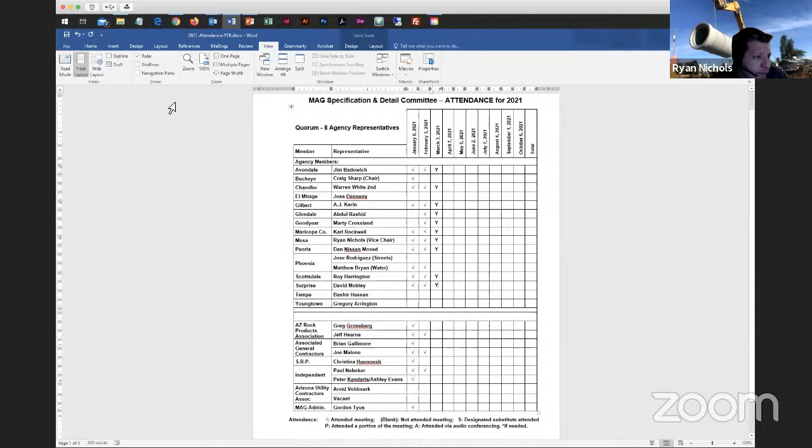Okay, Scottsdale, yes. Surprise, yes. Tempe or Youngtown? Okay, going back to Phoenix one more time. Matthew's a yes via text through the chat. All right, thank you. So the minutes are approved as sent out.

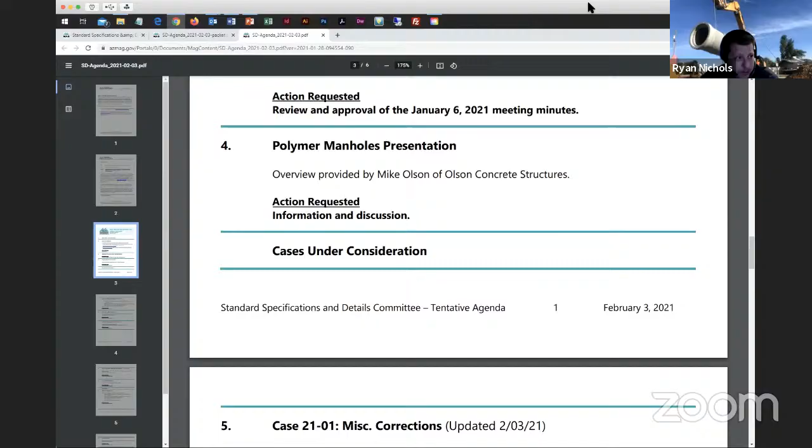Okay, moving on to item number 4, polymer manholes presentation. We'll have an overview provided by Mike Olson of Olson Concrete Structures, and we'll turn the time over to him. All right. Well, first of all, can everyone hear me? I'd like to say thank you guys for your time. I know that I only get 15 minutes, so we sent out a couple PowerPoints. Hopefully there's been some review.

Just a quick background on myself. My name is Mike Olson. I am pretty much a native Phoenician. I've been commuting back and forth between Phoenix and Vegas for the last 30 years. Cut my teeth working for my dad since I was 13 at a company you guys probably are aware of, Olson Precast of Arizona. And super excited to not be competing against them, but into this new technology called polymer. So that's where we're at today. We have opened up our plant located on 35th Avenue and Lower Buckeye. Super excited, state of the art.

So what I wanted to focus on was our product, and with only 15 minutes, I'm sure there's a lot of questions, but this just didn't happen overnight. I've been researching and looking at polymer products. I've teamed up with a couple different polymer outfits from around the country, and each one I felt at the end of the day, this isn't going to work, or they didn't have their technology down.

About 5 or 6 years ago, my division manager in Tucson had met Rich Cabetta with the Solid Cast polymer group, and they started doing projects and selling some stuff. Slowly I met him, and I was a little bit tentative. As I got to know Rich, and researched the mix and the design and the qualities, I got pretty excited about it. And so we took the big plunge.

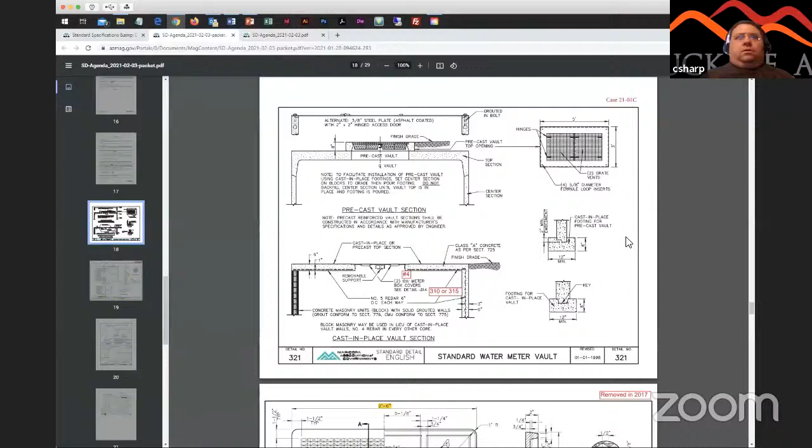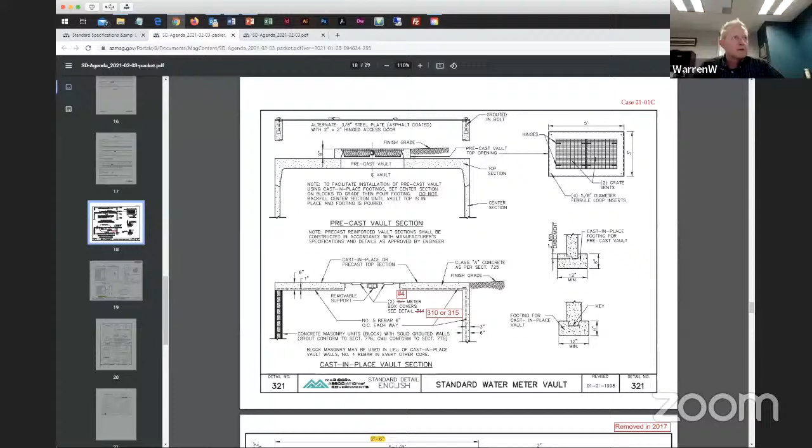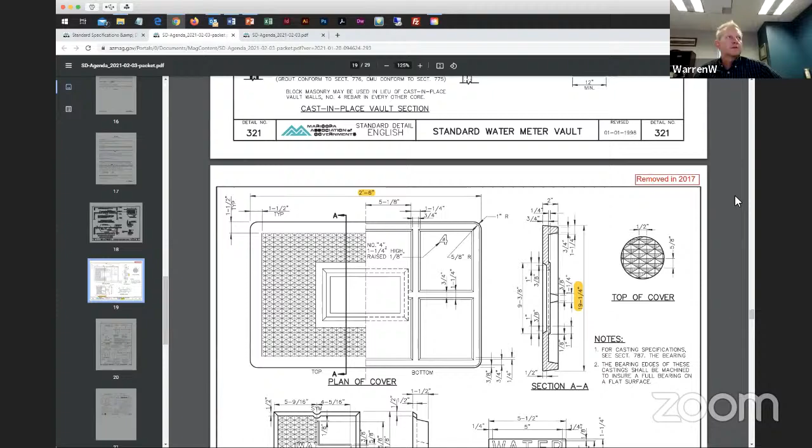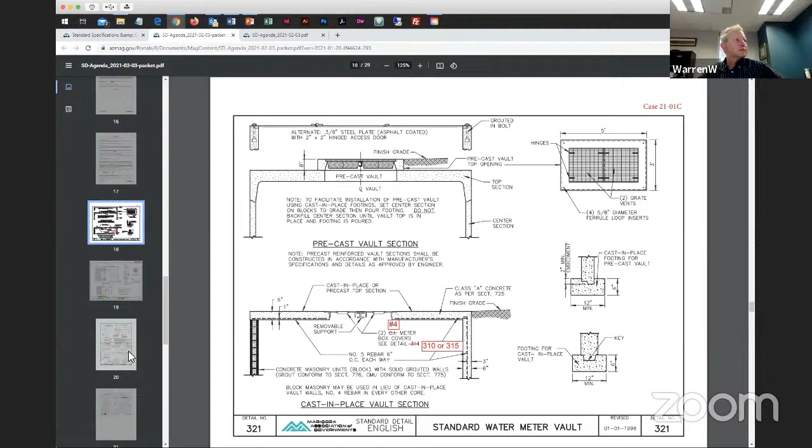From what I can tell, at least in Chandler and some other agencies, most seem to use more of a hatch cover type of setup versus the box covers like this, but that's open for discussion. And that's the next one down in the list there Gordon was going to click on. So for the larger meter vaults, agencies have similar details, it looks like, where they actually specify the vault dimensions. Maybe it's cast in place or a precast type of vault setup. And then they have a special type of lid that may be a non-slamming type of lid, things like that. So that could be another case down the road for us to discuss in water and sewer maybe.

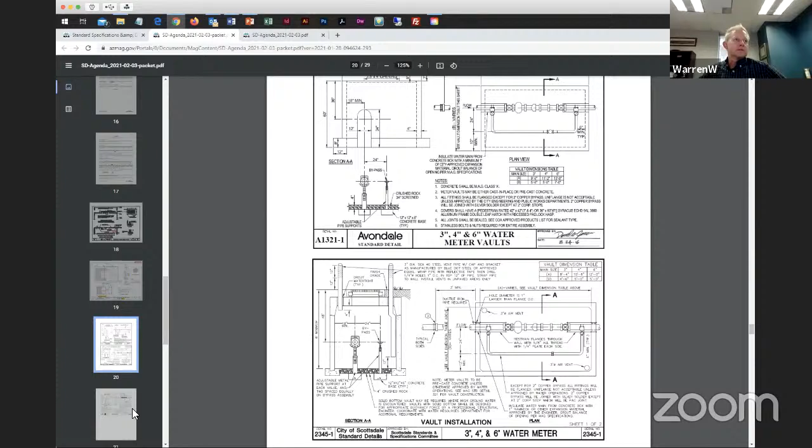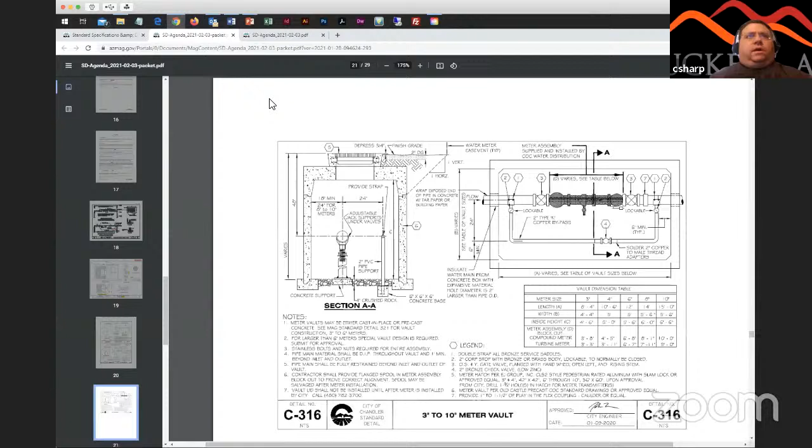You can see here on the Chandler detail, note number 5 says meter hatch per EJ group style pedestrian rated. So we may have two types of generic hatch details, potentially for a pedestrian rated or traffic rated with the slam lock, something like that. But again, we may want to talk more in water and sewer if that's more or less the standard out there. And I haven't looked at all agencies. Okay. I'm assuming most of these hatches or lids have like a spring assist on them. Is that one of the standards? Yes. Okay.

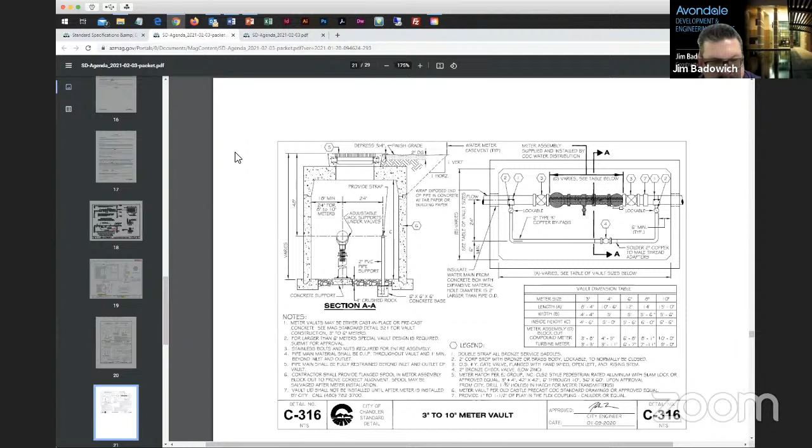Are we just talking about the lids, guys, or the whole vault itself? The lids, but the vault, again, if we wanted to discuss standard vault dimensions, that could be a topic in water and sewer if we thought that would be helpful. Yeah, we've looked at these and we've had to modify a lot of our jobs. We end up with custom designs because of the way the plumbing is, like for PRVs. If you have a large PRV vault, there's more plumbing involved, and some of these, like the MAG ones, don't work, so you've got to come up with your own. So it's a tough one to come up with a general standard. Maybe we could have some items that are standard and then the sizes can be variable. That's what this vault dimension table on the Chandler one does, I think Scottsdale may have that too, where based on the size of the meter, it determines the size of the vault.

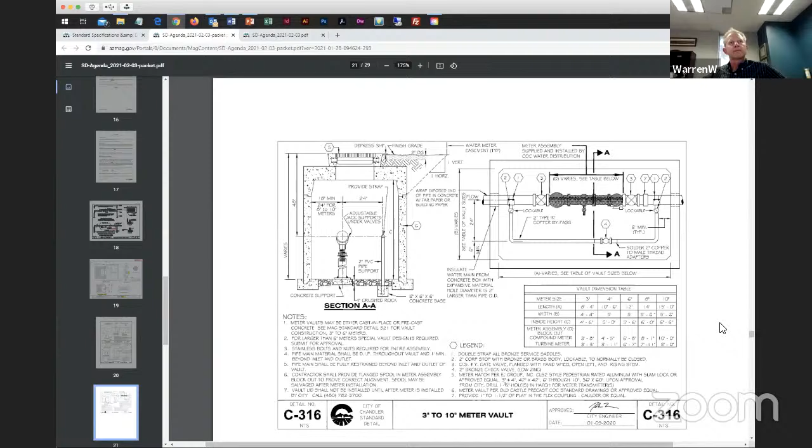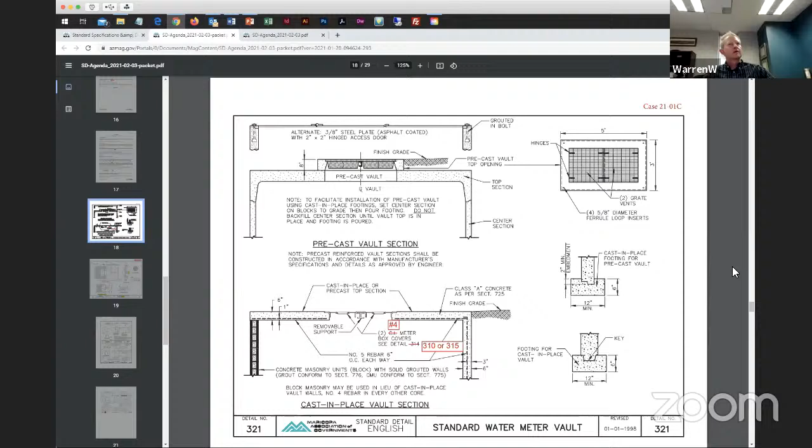Yeah, that's a great idea. It's probably been 10 years ago when we did this, but they were building these massive vaults out there that people could live in. So then we scaled them down to be more appropriate for the meter size, and not too small, of course, because you've got to get down there and work in it. But anyway, that's something we can talk more about. Okay. Thank you, Warren. I know in Buckeye we're trying to get away from the underground vaults, confined space issues and whatnot. But in terms of the lids, we can definitely discuss that more in the water and sewer working group. For the miscellaneous corrections case, you're just looking at replacing the lids on this first sheet, correct? Yes. Okay.

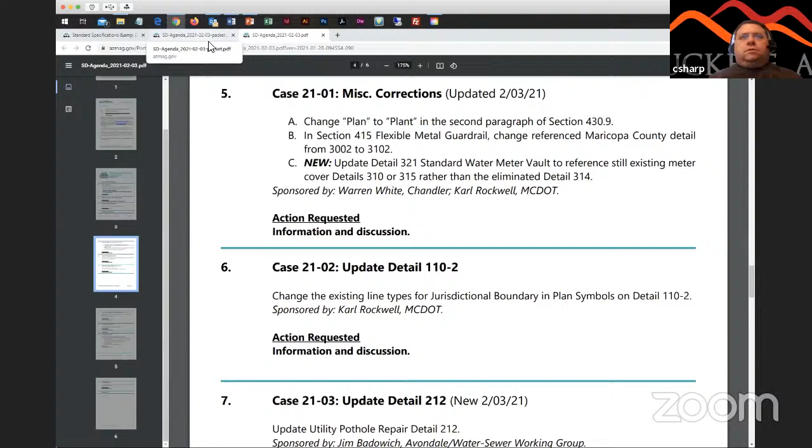So, okay, moving on. Number 6, case 21-02, update detail 110-2, plan symbology. Karl? Yeah, this is a request from our CAD group. The current jurisdictional boundary is pretty thick and pretty solid, and it obscures important information. We'd like to make it more transparent and not as thick. That's really the whole change. I don't know if there's any questions on that or not.

Did you have an example, or are you guys still working on that? You're looking at the example now. I'm sorry, I don't have an existing one to compare it to. Okay, I just see it's grayed back a little bit. Option 1, option 2 is a little more bold. Yeah, I don't think option 2 changed. Okay. Yeah, I think it's pretty straightforward. So, anybody else have questions?

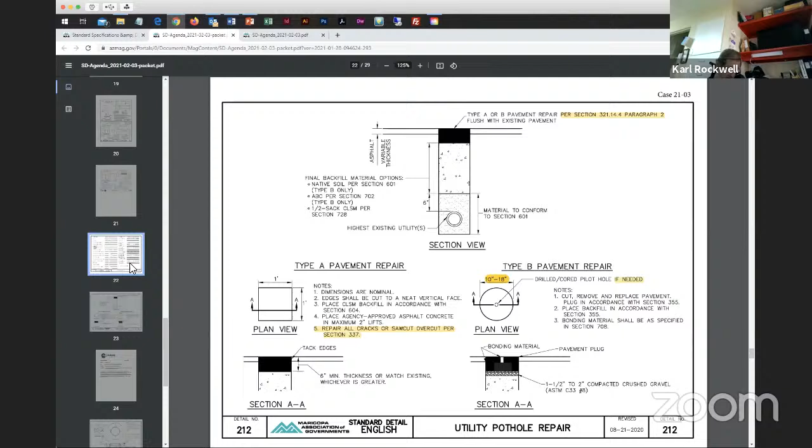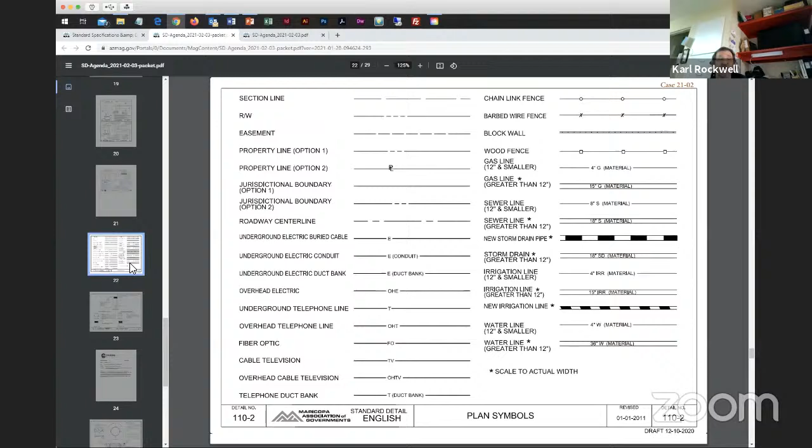Okay. We can move on, Gordon, to the... Yeah, actually, for both the existing ones now, option one is a really thick, solid dark line, and option two is just about as thick and grayed back a little bit. We'd like to go to a lot thinner, and for option one, a more transparent type of line type.

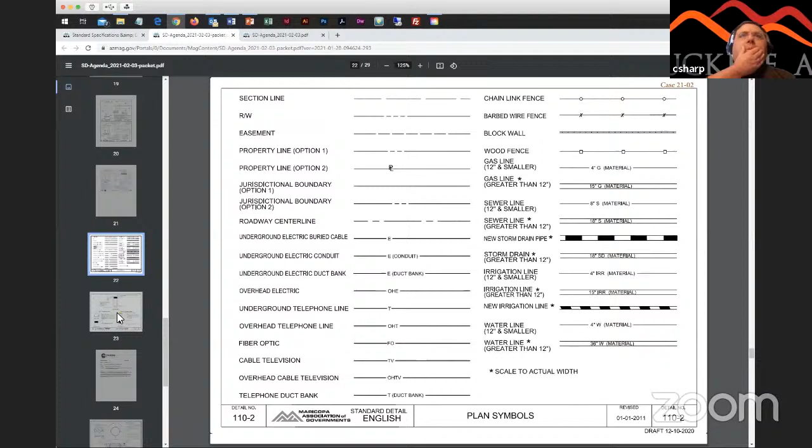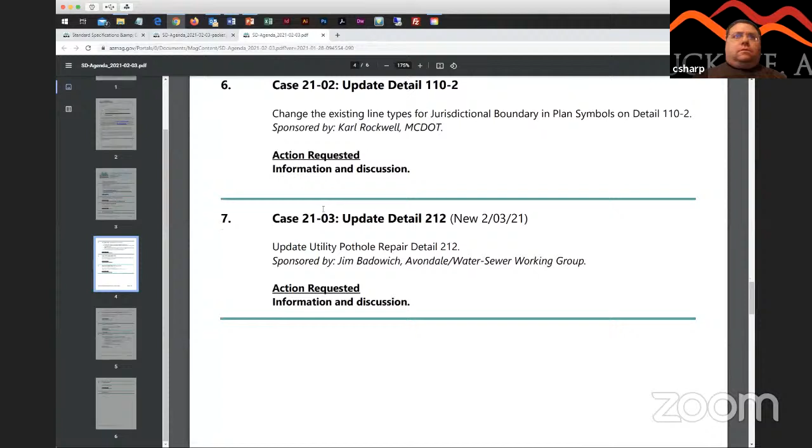Okay. Any questions? Okay, thank you, Karl. Gordon, if we could go back to the agenda real quick. So moving on to item number 7, case 21-03, update to detail 212. This is the pothole repair detail we've been working on for a while. Jim, do you have an update on that?

Yeah. I think you see in front of you the detail, the highlights. Those are the things you wanted to add or change. I think one of the big things in the last meeting we had from Arvid was that section AA on the right side there. Originally, it actually showed the hole going all the way through, and Arvid pointed out that that's not necessarily the case, and so we cut off part of that hole, and it just is a small area now.

And then he was saying that I guess drill rigs don't need a pilot hole apparently, so the pilot hole may not be needed. Right. So that's why that's an option there. Yeah, he says depending on the Vactor truck, it just might be able to pull it right out of the hole without the pilot hole. Right. Then on type A there, item 5, you want to repair the cracks or saw cut overcut. Right. So we talked about it a lot. I know the materials group came up with some alternate materials. So I think we've got a pretty good setup here with these.

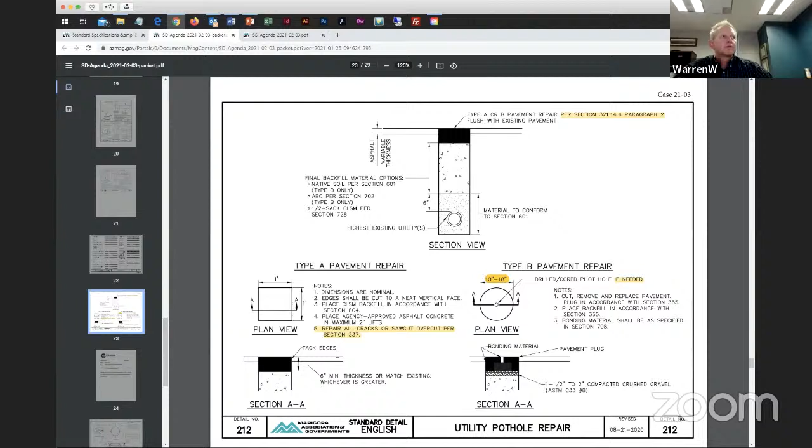Okay. Is that what you're implying, Warren? Yeah, exactly. We just wanted to get it before the main committee and see if anybody had any additional comments. And actually, even with that edge mill, with or without the plating, it prevents that edge from easily allowing water to penetrate the subgrade, right? Yes. I'd like to ask everybody, I haven't seen a whole lot of plating for these small plates, because I think there's a danger that they can fly out. Yeah, that's definitely uncommon, as it relates to a plate that size.

If it were something that small, right? If we were to protect it, it would be a cold mix and a temporary solution prior to coming back for the permanent repair. A plate that small is just something that we wouldn't use in the roadway, nor is the availability really there.

Yeah, it's not typical. You're right, Joe. I don't see it too often. If it's temporary, they usually just put the native back in there and just cold patch it, and then when they're done with it, for permanent repair, they suck all that native out and then put in AB or a CLSM and then patch it.

Correct. Yeah. And a lot of times, I see the hole size there. In an ideal world, that utility would be able to be found in there. Sometimes the size of that hole is growing if we're trying to chase a utility that's not technically where it's supposed to be. And if there's a cluster of them in a certain group, then we would get to a manageable size to get that location repaired accordingly.

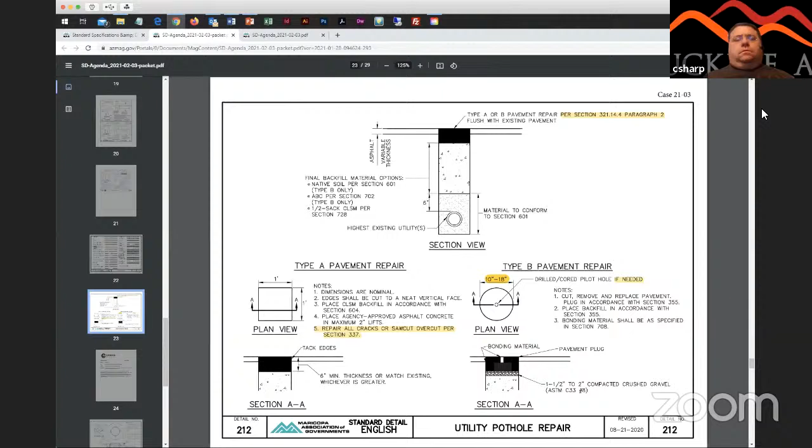Okay. Have you guys ever done an edge mill on the type A repairs? No, not typically that small. It likely wouldn't be a problem depending on how thick and what condition the asphalt's in. We just use a small milling machine attachment on a skid steer or something like that. It definitely would drive costs up because that's another step, another piece of equipment.

And it's something that needs to be done on sometimes a large amount of potholes depending on the size of the job, so that's one thing to consider. More often than not, the potholes accompany a full roadway replacement in an ideal situation, or are in line with a trench repair. So if it's kind of a one-off, it probably wouldn't hurt to explore that, but it increases costs accordingly.

With that operation of an edge mill, you figure you've got a 1x1 hole. Typically you would edge mill with a milling machine like that a minimum of a 1 foot edge mill in addition to that. It's definitely a very small area, based on the size of even a smaller piece of equipment that would be performing that work.

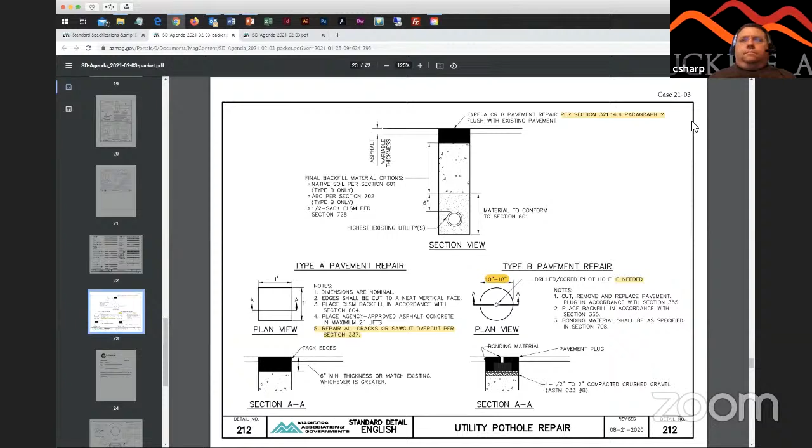So whether or not the ends would justify the means there is something that would need to be determined. That's true. One thing I'd like to add on this is that one of the reasons we're looking at this, Joe, and everybody, is that there's just too many of these failing, and so the idea was, well, we've got to beef up the type A, with the thought that hopefully we can get more companies to go to the type B.

Because I know cost is a factor, but the problem is they're failing. And so we've got to look at the spec and maybe see where we need to improve upon it. And that's why the type B is something I think agencies are pushing more for. We've talked about it in Avondale, to start to require it, even for temporary, because then you're in and out.

And the other thing too, a lot of potholes now, guys, are being done by the dry utility companies, the cable companies, fiber companies. And all they're doing is boring and they're not coming back. If you're doing a water line or whatever, you're going to come back and do a trench replacement or a complete replacement or a mill and overlay on the street.

But I think the majority of these potholes are being done by the horizontal drilling companies that are working with dry utilities, and they bore their utility in, and then they're gone. So that's the issue, their repairs are permanent. So that's what we've got to do. That's a great point. Bore shots and everything.

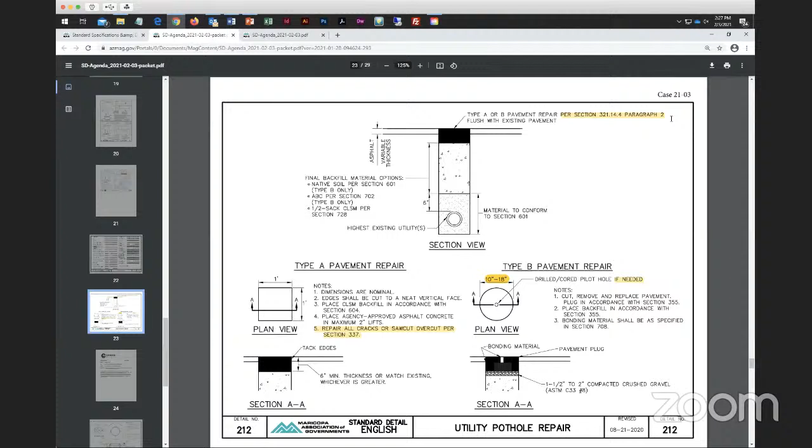But by far, that's our biggest problem with these repairs failing. It's the dry utility companies that aren't repairing them properly. And so I think that was the onus behind making this a little bit more stringent, so that they're going to have to adhere to it. The city CIP projects for pipelines and other stuff haven't really been an issue, because like you said, the stuff gets replaced completely anyways. So it's mainly the dry utility companies that are the culprits in this.

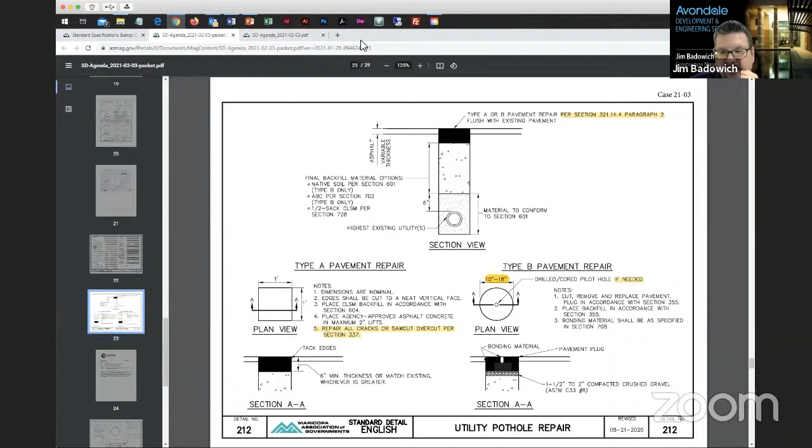So anyways, I don't have any more comments. If anybody doesn't have anything else, we can move on. Okay. Well, good discussion. Thanks, Jim. Thank you.

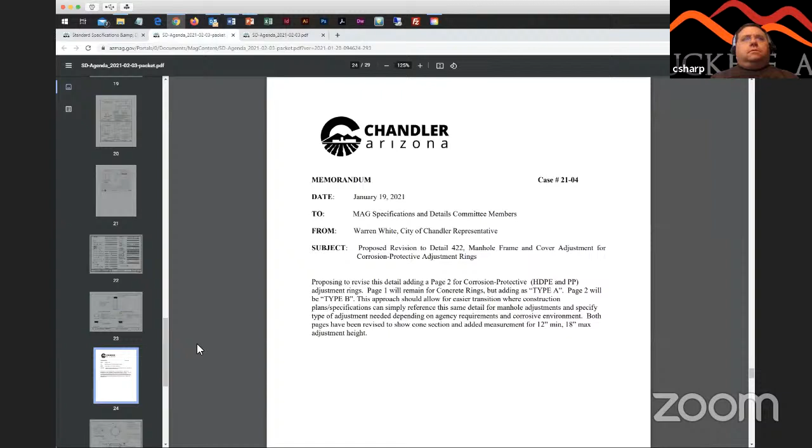Moving on to item number 8. Case 21-04, it's an update to detail 422, a new detail 422-1, corrosion protective manhole frame and cover adjustments. Warren? I know we've talked about this for a couple of years now in MAG, and I think we've probably seen presentations on the new types of adjustment rings in water sewer, on the polypropylene and the HDPE rings. And Chandler's had a detail in place for a couple of years now.

So this detail proposed is a revision to detail 422, keeping, of course, the concrete rings that have been in place forever, and adding a second page for the type B adjustment for the alternative types of rings, polypropylene and HDPE. So going back to page 1, let's just talk about that. Again, this detail is for the most part the same.

The only changes to this detail are adding type A, and in the bottom section, expanding it a bit to show the cone section, and over on the right, adding a dimension that's been missing that states the 12-inch minimum, 18-inch max for adjustment rings. I'm sure we've all had instances on CIP projects where there is no adjustment left to make, or there's too much, or you end up with a flat top manhole where you didn't plan on it. So I think that's a helpful addition.

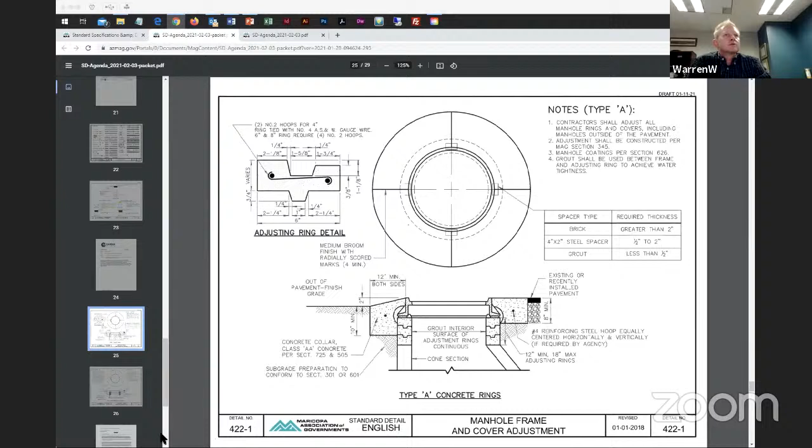And the other change is in the notes, note number 3 did say manhole coatings per agency. Now I changed it to say per section 626, which is our new corrosion coating spec. What is the title, Jim? The new section 626 for all the different coatings. So that's the only change on this one. So we can go to page 2. Well, any questions here on page 1?

Yeah, I was just looking while you were talking about where we'd missed that 12-inch minimum, 18-inch maximum, and I thought for sure it was in there. It's on the 420-1 detail. Right. This is definitely a better location for that. Great. Okay.

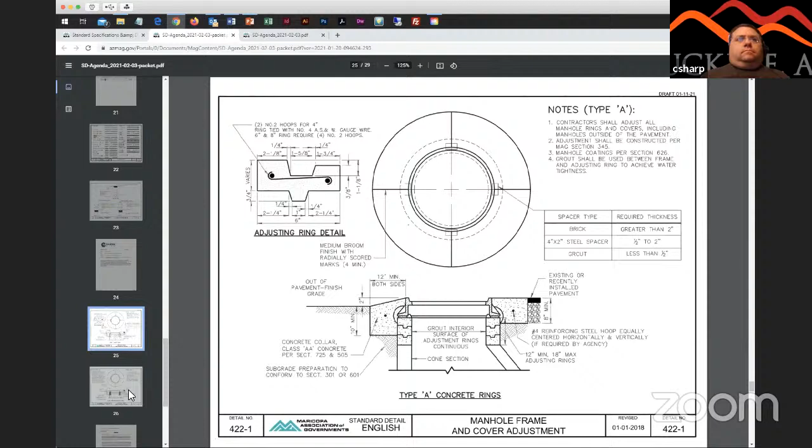There is adhesive that you apply per the manufacturer between the rings, and of course the frame and cover to the top ring and at the cone. There are situations where you may need to use mortar to smooth or level a rough cone section, and possibly even on some of the other manholes; the fiberglass manhole manufacturers recommend that too. Obviously, the trick with that mortar is not to put too much, and it needs to be high strength.

Would it be just a mortar, Warren, or would there be, I'm thinking, a Ramneck, a butyl rope, rubber mastic rope, or something like that that could go between the concrete and, we'll call these ones the HDPE or adjustment rings? And in a lot of cases that might work, but the field situations and recommendations from the manufacturer is that a lot of times those cones may be just plain rough, and even a butyl rubber rope is not adequate. You have to apply some material there to get it to a smooth enough surface, even to put your mastic rope on it.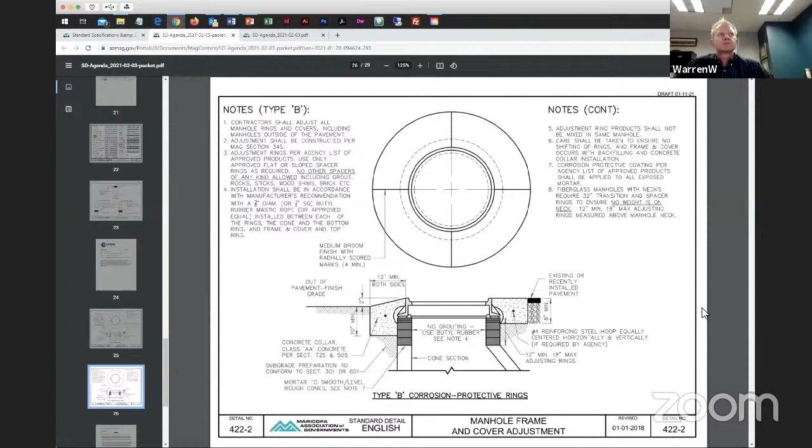I noticed on note number 7, that one needs to be updated. Corrosion protective coating per agency list of approved products shall be applied to all exposed mortar. The new section 626 states that same thing, I think, per agency list of approved products. So we might be able to revise that note 7 with some discussion. Okay. No, this is good. This would go along with the corrosion resistant manholes. Yeah. So excellent. Thank you, Warren.

Any other questions?

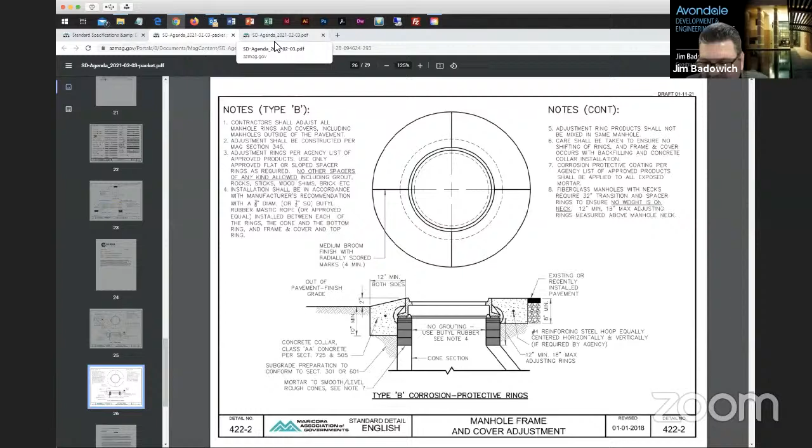Pretty soon I'll have a manhole that'll last 100 years. Yeah. And our budgets will go through the roof, right? We'll never have to come back and fix any of these things. So

All right, moving on. New and potential cases. Anybody have anything that's up and coming that they're talking about possibly submitting for a case? Not really hearing anything. I'm going to move on down to item number 10, working group reports. Water and sewer. Jim.

All right. So yeah, we met on the 19th. We had a discussion about the bloopers. Oh, Gordon, we had some discussion about ASTM references, I believe. Sorry. Yeah, we reviewed that sheet of some of the details that need to have ASTMs updated. And then I think there was also some discussion about, well, I think one of Warren's bloopers came out of that discussion, but there are some others that might need to be looked at.

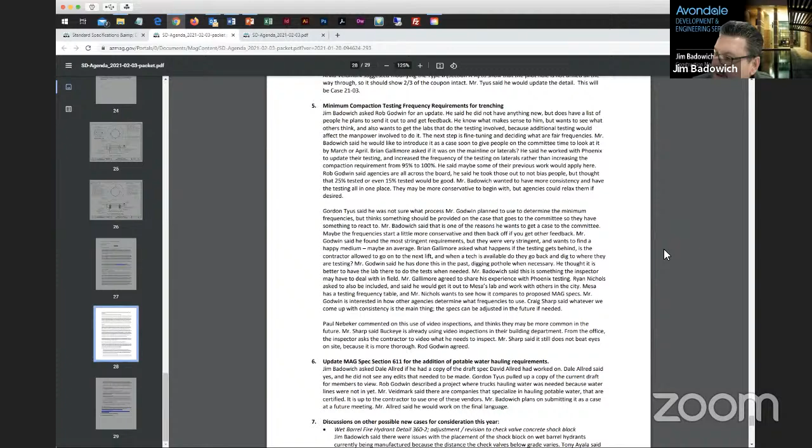So you might see that in the next couple of months come to the main committee here. So that might be one of your new cases, Craig. Then we've got another one, item 6. We're looking at updating section 611 with the potable water hauling requirements. We're pretty much just going to take what is in the Arizona Administrative Code and put that in here, because there are sometimes small jobs and contractors are using water hauling trucks, water hauling wagons, they call them. So we want to make sure that they're being used in accordance with the state statute. So that's just going to be a small spec that'll be inserted in 611.

Then other new cases I'm working on is a modification of the wet barrel fire hydrant detail 360-2. That might be the spec that only we're using. I understand, Dan, that Peoria may get away from using that wet barrel. Yeah, our water services guys have asked us to stop using those and requiring those on the development CIP side. We've got a number of them in the city, so probably through attrition they'll be changed out. Oh, all right. Did you have any feedback with the fire department people? No, I think they supported it. Our water services folks actually took the lead and coordinated that effort. Okay.

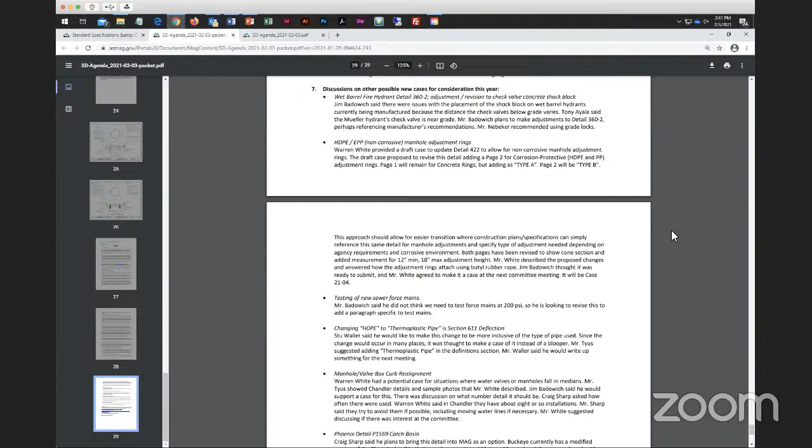Anyways, that will be coming. And as a result of that, we may end up modifying both details, the dry and the wet. I know a lot of contractors use those grade locks. Paul, you're aware of those, right? Yeah, absolutely. It's a fantastic tool. Yeah, because it's a lot. I've talked to a couple other agency people and it's the same thing. Sometimes these adjustments are a real hassle. So anything that makes it easier for the contractor, and I think these grade locks are pretty widely accepted and used as an industry standard. So we might want to update both the specs with that in there.

So if you're doing a 12-inch water line down a major arterial and you're really deep, you can go over to the curb deep and then jump it up with the grade lock and be right at grade without any flexing of the pipe, and that's why they're so useful. Yeah, I like them. So I might want to try to put those in there. So we might see a modification to both the 360-1 and 2.

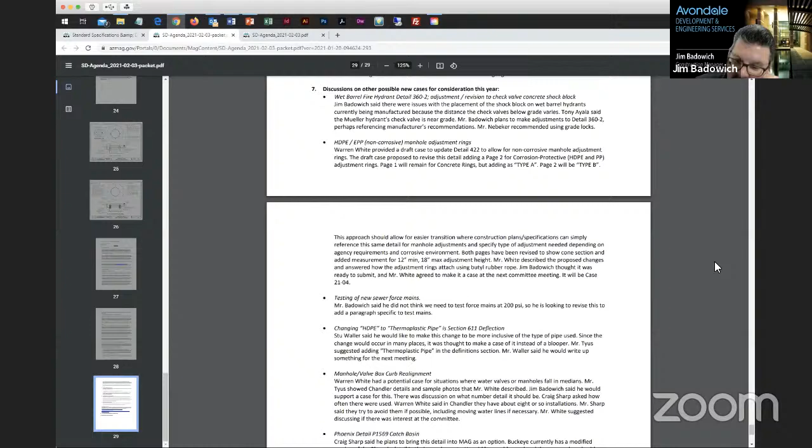We had another discussion about maybe having another section in 611 for force main testing. I think currently most people on the force mains, correct me if I'm wrong, don't you guys use like a 200 PSI? Or do we just use a water spec for pressure testing? I found it all over the map, Jim, when I've done it. From plumbing code being used to 100 PSI to engineering to 200, it's all over the map because it doesn't seem like anybody really knows what it should be.

Well, that's one reason I think we want to add something to MAG on that, because when we've tried to use the 200, we've got pushback from even the design engineers saying that's overkill. Well, right, it doesn't run at 200 ever. Right, so that's why I think we're going to come up with something just for force mains, and then it'll be a reduced pressure test. I think they still should be tested with a pressure test, but it doesn't need to be 200, that's for sure.

We had another one. Stu Waller brought up changing HDPE nomenclature to thermoplastic pipe. Is that a brand name thing? You know, it could be. I don't know. Not really. No, I mean, HDPE, is that a brand name? No, shouldn't be. No? Oh, okay. I don't know. I think it's more classifying.

HDPE is a number of different thermoplastic pipes, and I think that's why he wants to change that. Yeah, that was what he was talking about. There's HDPE, there's polypropylene PP pipe, and it's all a thermoplastic. I think the direction of this comment was, instead of saying HDPE and PP and whatever other types of pipe come out in the next few years, we'll just go to thermoplastic, which is kind of all inclusive.